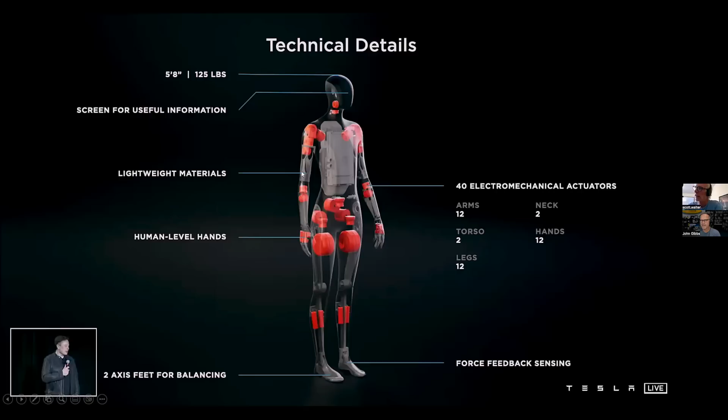If we look at the original AI Day slide here, we can kind of see there's some mechanism hidden in here, which I've been trying to figure out all along. I'll do a little close-up here. Maybe what they're doing is revealing what that mechanism looks like now, because you do have a lot of different actuators up here that are doing something. I wasn't quite sure what this one was, and I was wondering if there was a linkage that came on down here and then continued on, so it may be that they refined that.

Could it be that we're actually looking up at the shoulder, and it's the actuating part up at the shoulder that then comes down to the elbow? Or are we actually looking at the elbow? I'm not sure. If that was the case, you'd be looking like under the armpit of the elbow, right? That could be. Who knows what direction we're looking at it - it could be bottoms up or from a different direction. I have something here to kind of show this.

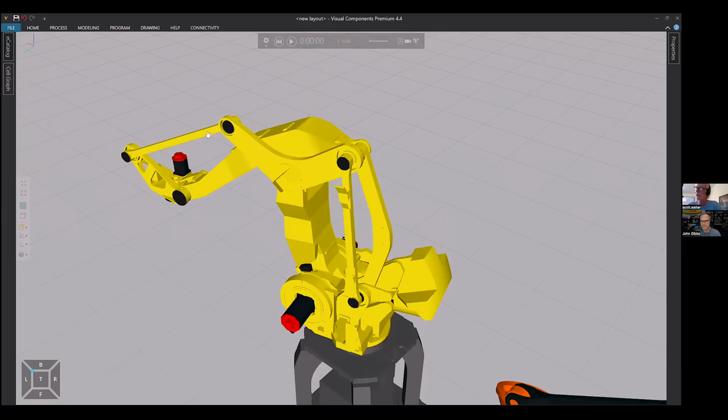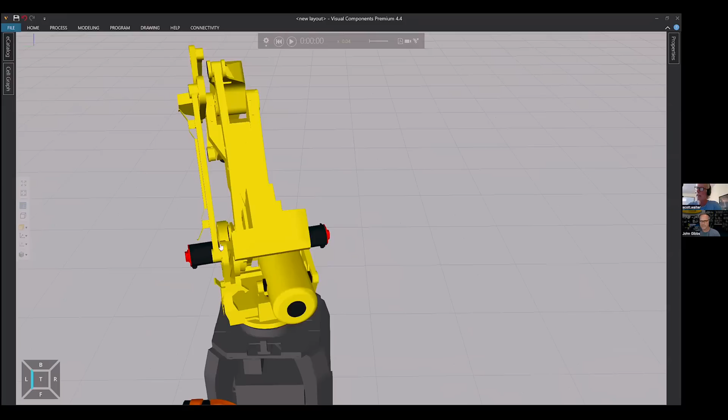It's not uncommon to have what look like over-engineered or complex mechanisms like this. Here's the elbow joint of a robot, and you've got these other linkages that go through here because you're also trying to deliver movement somehow past that elbow. So the elbow has to articulate on its own without anything happening over here, and then you go ahead and have a separate articulation. This mechanism is able to then move and actuate it. In this case, they put all of the actuators way down here at the base, so the two actuators are able to make axis 1 and axis 2 move, and you do that with a bunch of crazy mechanisms or parallelograms going on through here.

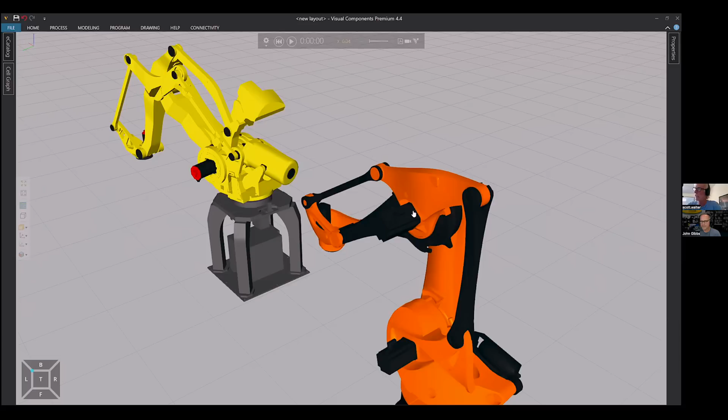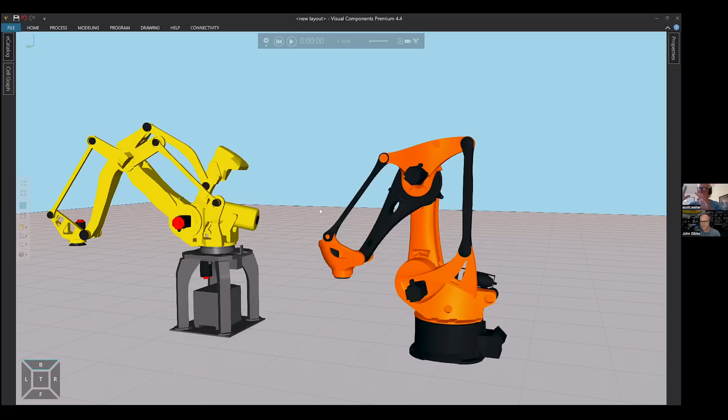The other kind of solution to doing something very similar is like this - you've got one motor here designed to drive this axis. Rather than doing it through parallelograms like I have over here, you actually have a motor driving it right on there. It simplifies the mechanism a little bit, but you can still see you may have parallelograms in here to keep something at a certain orientation you prefer to have. I bring this up just to give a hint that what they're doing isn't out of the ordinary, it's just very compact and they're trying to solve something.

Lastly, I tried to come up with an idea of what was going on with Optimus by looking at the actual drawing, so I tried to make it look like what was there. I had kind of a guess of what's going on here, and I don't know if this confirms my guess or not. Right here we have a hinge joint for the elbow, and we may have some sort of articulation - it could be a piston cylinder kind of thing that we're seeing there. Or in this case, I was thinking maybe it actually rotates, because in the picture it's there. So I was just going by what information they were giving us.

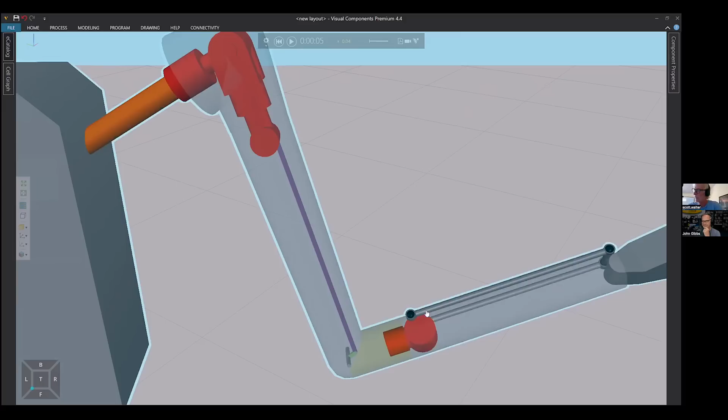And the way it works is that this is the pin joint, and you push something on here, and you have a little lever arm there that allows it to move around. And in that case, that would go back to where that yoke is. So this doesn't look at all like what's in that drawing, but I want everyone to get the idea.

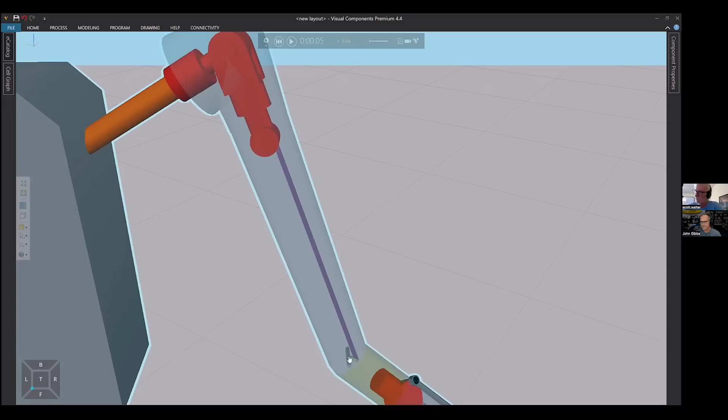If you push on something like that and you have something that articulates it, you can move around here. So let's go back to the beginning and take a look at these things. So it might be that this is somehow pushing up, and there's a lever here that causes it to rotate about maybe this axis, which I assume is the actual elbow joint right in there. That's a bit of a guess. And then them trying to get other things going on through here out to the end of the wrist.

Crazy. So you're actually saying this is upright, oriented like this is the way we're looking at it. Maybe we're looking at it like this, maybe the hand going out like this. So okay, because I was thinking upside down. This is the upper arm, okay. Could be down. And you never know. It could.

See, I'm trying to think - what are these things doing? They're kind of coming in and doing nothing. I'm thinking that they would be going out and doing something. They're connected in there, unless - I think they all kind of rotate about that.

It's an interesting mechanism, we'll see more details. Obviously it's very grayed out. But I would expect that no matter what, we should see something about this come Friday. Probably there's going to be a slide on that, and I'll be all excited about that.

Or they may actually have a demo model available where you can actually play with it, because when we went to the investor day, remember they had the motor that you could actually spin, and you could look at all the linkages inside the motor. Exactly, so maybe they have something like that.